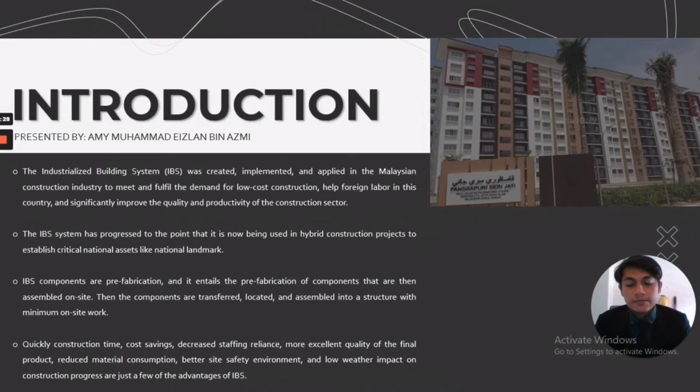IBS also consists of prefabrication, and it entails the prefabrication of components that are then assembled on sites. The components are transferred, located, and assembled into the structure with minimal on-site work. Quick construction time, cost saving, decreased staffing reliance, more excellent quality of final product, reduced material consumption, better site safety environment, and low weather impact on construction progress are just a few advantages of IBS.

The aim of this research is to identify the components of the industrial building system at Seri Jati Apartments, Setia Alam. The objectives are: first, to justify the concept and framework of IBS in Seri Jati Apartments; second, to identify the application of the IBS system in Seri Jati Apartment; and lastly, to investigate the modular components of IBS and IBS score calculation in Seri Jati Apartment.

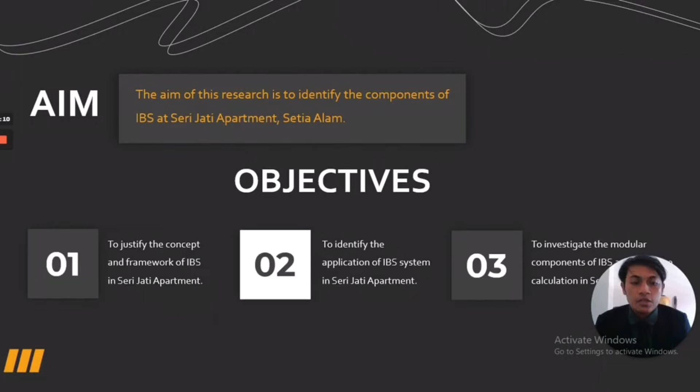Next slide, I will present the background of the case study. The case study about the industrial building system has been conducted at Seri Jati Apartment, located at Off Persiaran Setia Prima, Precinct 15, Setia Alam, 40170 Shah Alam, Selangor.

This apartment consists of 6 blocks, 3 of which are 10 storeys while the remaining 3 are 11 storeys, with a total built-up area of approximately 813 square feet. Seri Jati Apartment construction was launched in 2012 and was fully completed in 2014. SP Setia in charge of the project development, the design of this construction apartment uses strong suits. The building incorporates the vertical and horizontal duplication of parts.

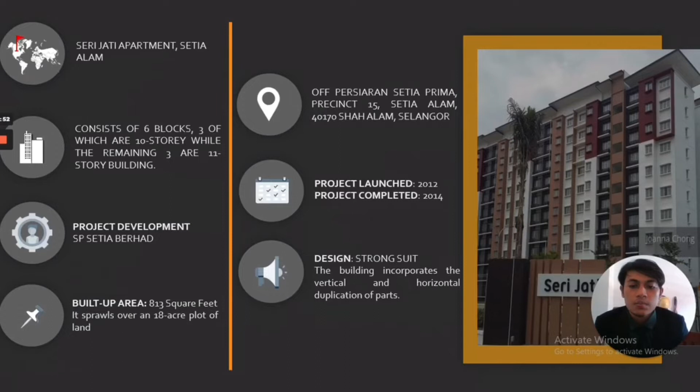Assalamualaikum, my name is Siti Noizati binti Muhammad and I would like to present about the concept and framework of IBS. The IBS concept is appropriate for buildings with a straightforward design structure.

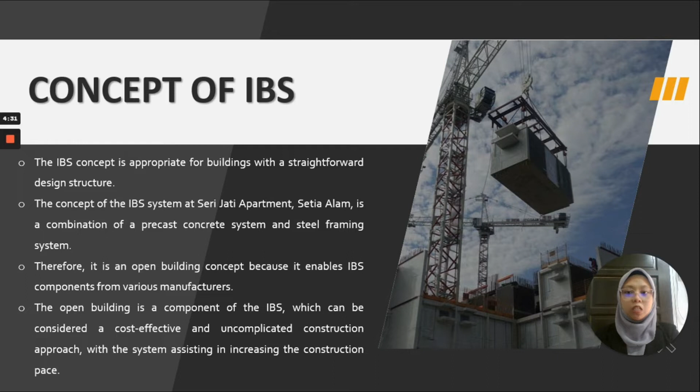The concept of the IBS system at the Seri Jati Apartment Setia Alam is a combination of a precast concrete system and steel framing system. Therefore, it is an open building concept because it enables IBS components from various manufacturers. So this is the type of IBS components, which are the precast concrete system and steel framing system.

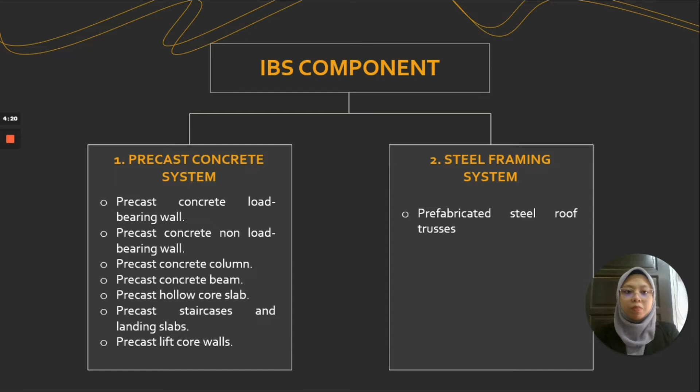We go first with the precast concrete system. The first one is the precast load bearing wall. The precast load bearing walls are an entire IBS factor in constructing the Seri Jati Apartment. The horizontal loads are transferred to the shear walls or service core by the precast load bearing wall component.

The next one is the precast non-load bearing wall. A precast non-load bearing wall is a wall that does not support any of the building structure, and it is sometimes called a partition wall.

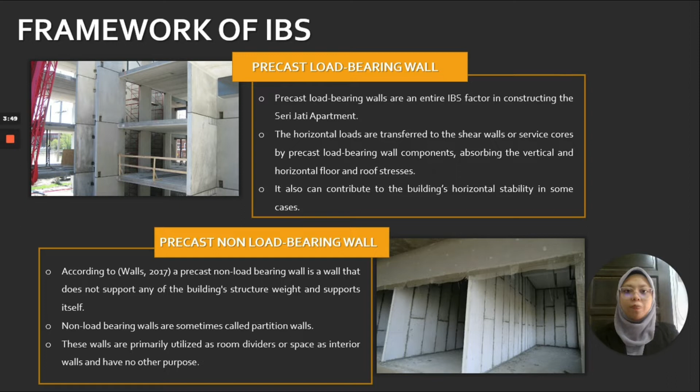The third one is the precast concrete column. A precast column is a load-bearing structural member widely used to support beams and slabs. Precast concrete columns are cast and cured on the ground before being lifted and placed where they are required.

The next is the precast concrete beam. The precast concrete beam is a load bearing structure that can support horizontal and vertical loads. The precast beam is simple and practical in design.

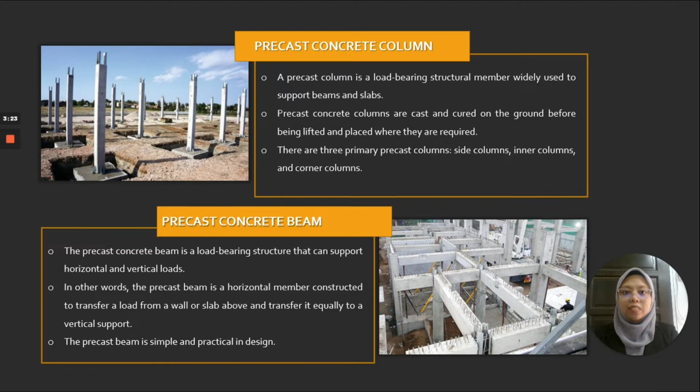Then we have the precast hollow core slab. Hollow core slab is a type of precast concrete slab. It is also called a void slab, hollow core plank, or simply a concrete plank.

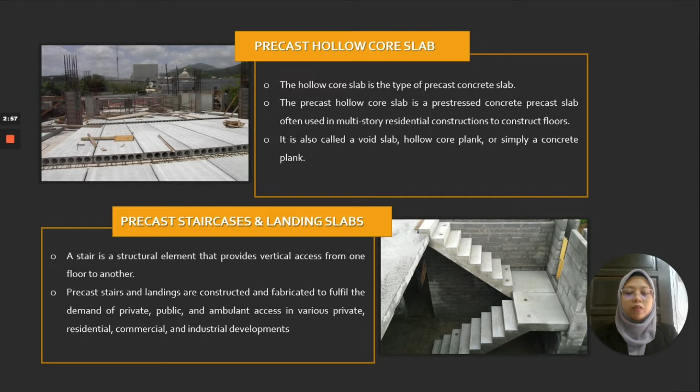Next is precast staircases and landing slabs. Precast stairs and landings are constructed and fabricated to fulfill the demand of private, public, and ambulant access in various private, residential, commercial, and industrial developments.

The precast lift core walls. The lift core is a means of transporting from one floor to another in a building. The precast lift core walls are commonly used in multi-story buildings such as apartments.

Lastly is the precast steel roof trusses for roof structure. Prefabricated steel roof trusses are a type of steel framing system. Seri Jati Apartment has used the Howe truss type for roof trusses.

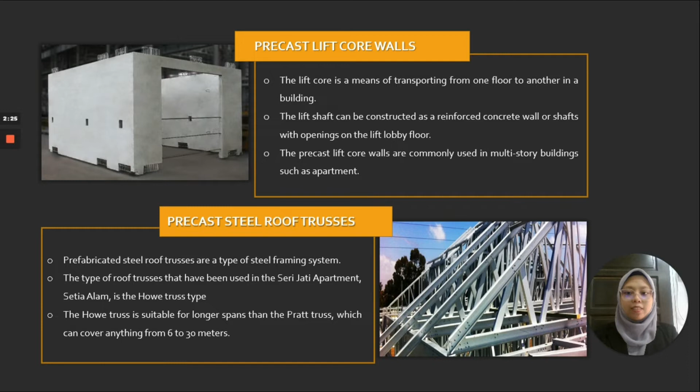For the construction system of Seri Jati apartment, conventional construction was used for the foundation and ground floor construction, but a larger part of the building used the IBS method. According to Kow data scoring, the IBS content score for block 6 of Seri Jati apartment is about 81.9%, which has been finalized. There are 3 advantages of the IBS score for this project.

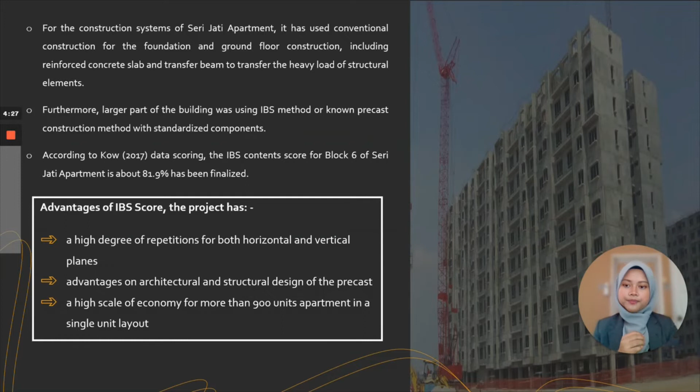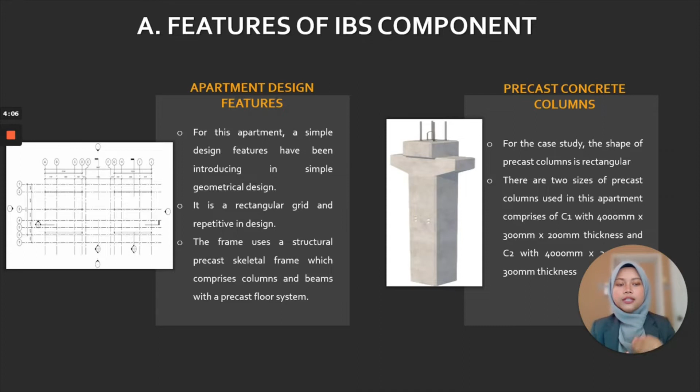Features of IBS components: first, apartment design features. For this apartment, simple design features have been introduced, with simple geometric designs, rectangular grid, and repetitive design. Second, precast concrete column, where the shape of the precast column is rectangular, and there are 2 sizes of precast column used. Next, precast hollow core slab.

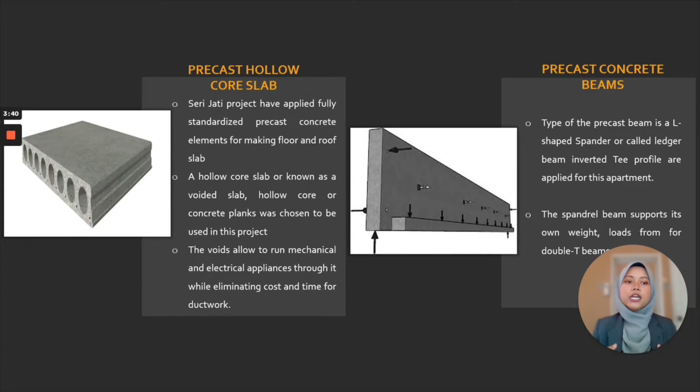Seri Jati project has applied fully standardized precast concrete elements for making floor and roof slab. A hollow core slab, also known as a voided slab, was chosen to be used in this project. Next, precast concrete beam. The type of precast beam is an L-shaped spandrel, or called inverted ledger beam. This profile is applied for this apartment.

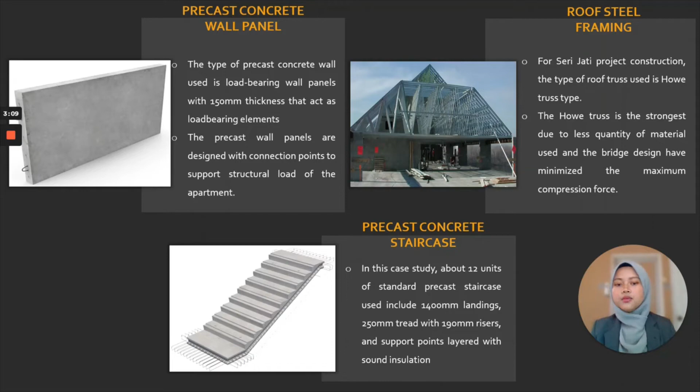Next, precast concrete wall panel. The type of precast concrete wall used is load-bearing wall panel with 150 mm thickness that acts as a load-bearing element. For the roof steel framing, the type of roof truss used is Howe truss type. Last, precast concrete staircase. In this case study, about 12 units of standard precast staircase were used, with support points layered with sound insulation.

Next, IBS suitability. IBS is suitable for use in the Malaysian construction industry, especially for housing where the building functions require mass production. There are some advantages of IBS adoption, including reduced project duration, saved costs for workers and materials, and others.

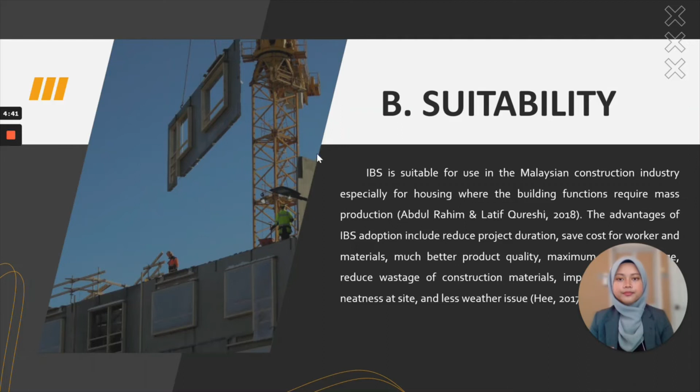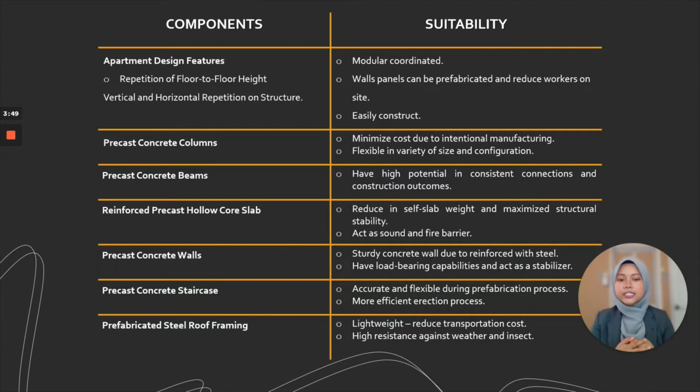For the reinforced precast hollow core slab, it could reduce slab weight safely and maximize structural stability, and acts as a sound and fire barrier. For the concrete wall, it is sturdy for strength due to being reinforced with steel. For the precast concrete staircase, it is accurate and flexible during the fabrication process. And last, prefabricated steel roof framing, which is lightweight and could reduce transportation costs.

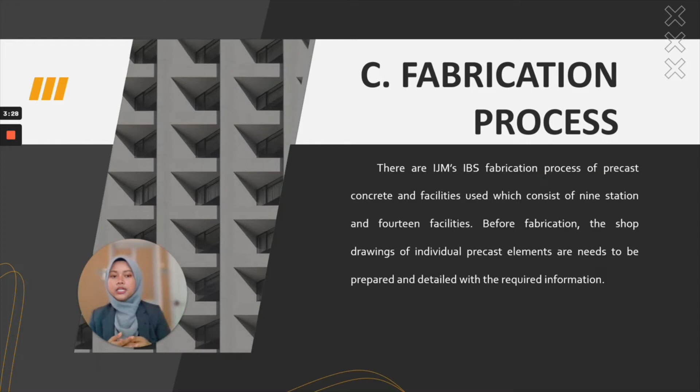Next, the fabrication process. There are IJM's IBS fabrication processes of precast concrete and facilities used, which consist of 9 stations and 14 facilities. Before fabrication, the shop drawings of individual precast elements need to be prepared. The first station is the pallet cleaning station, where the pallet is cleaned and freed from debris.

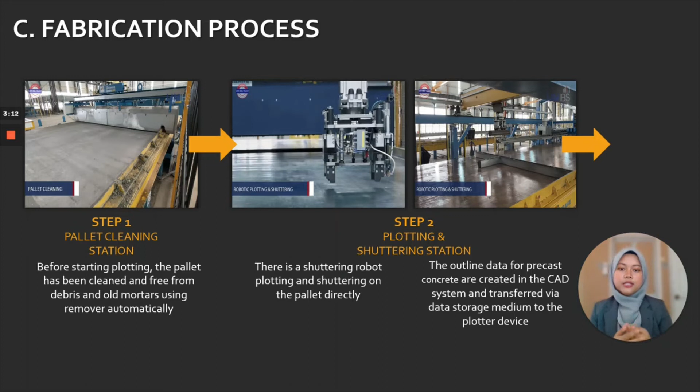Next, plotting and shuttering station, where a shuttering robot performs plotting and shuttering on the pallet directly. Third station is mesh reinforcement. An automatic customizable mesh production machine is used, and it is more intelligent and convenient because of the adoption of a PLC control system with touchscreen input.

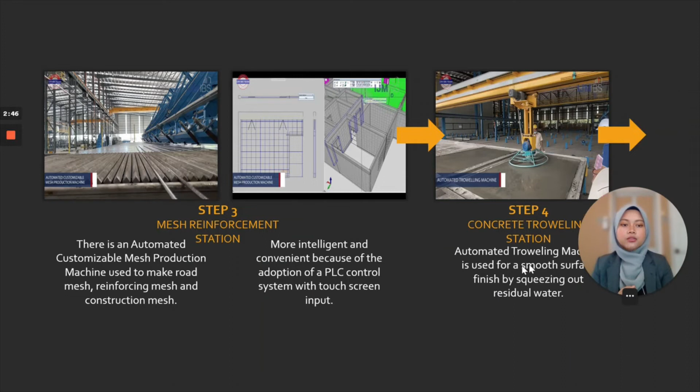For the fourth station is concrete troweling. An automatic troweling machine is used for a smooth surface finish. Fifth step, pallet stacker and curing chamber. An automatic pallet stacker is used for stacking the pallet into the curing chamber for natural curing.

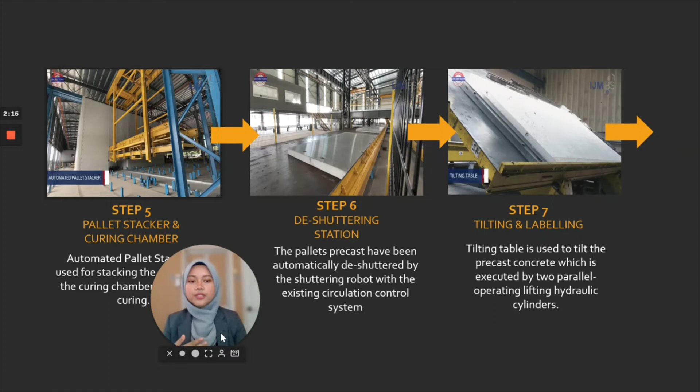Step 6, de-shuttering station, where the precast pallet is automatically de-shuttered by the shuttering robot. Step 7, tilting and labeling, where the tilting table is used to tilt the precast concrete, which is executed by two parallel operating lifting hydraulic cylinders.

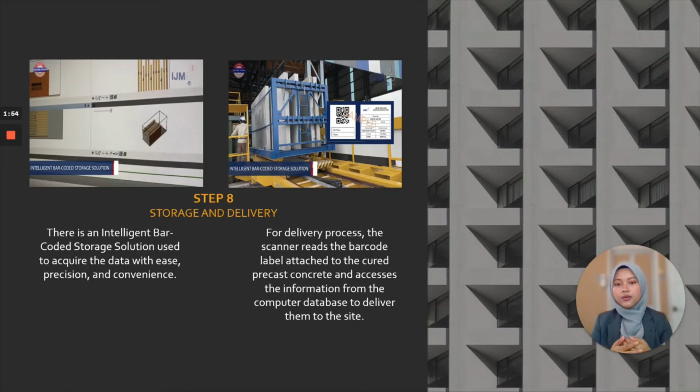The next, or last, step is storage and delivery. An intelligent bar-coded storage solution is used to record the data with precision and convenience. For the delivery process, the scanner reads the barcode label attached to the cured precast concrete and accesses the information from the computer database.

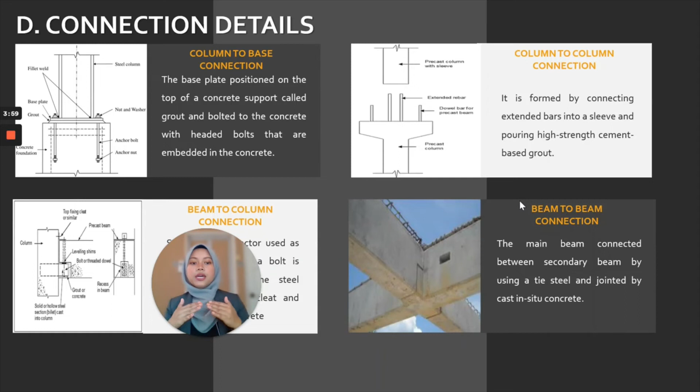Next, beam to column connection. A steel billet connector is used as the connection, where a bolt is installed through the steel billet to a bolted cleat and tied by concrete. Next, beam to beam connection: the main beam is connected between secondary beams using tie steel and joined by cast-in-situ concrete.

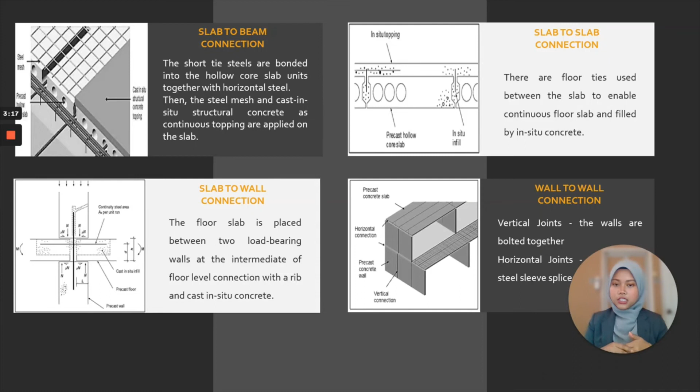Slab to wall connection: the floor slab is placed between two load-bearing walls, with the intermediate floor level connected with a rib and cast in situ concrete. For wall-to-wall connection, there are two joint types: vertical joints and horizontal joints.

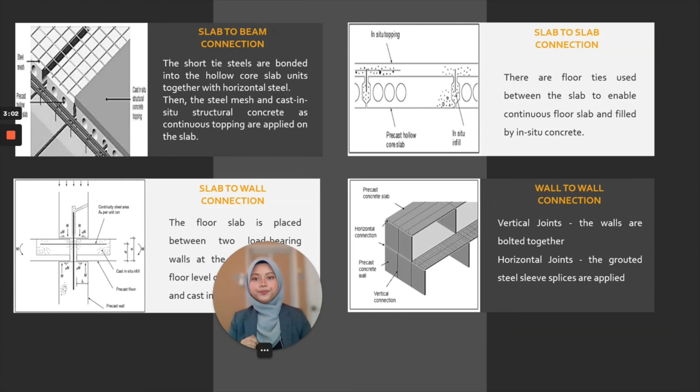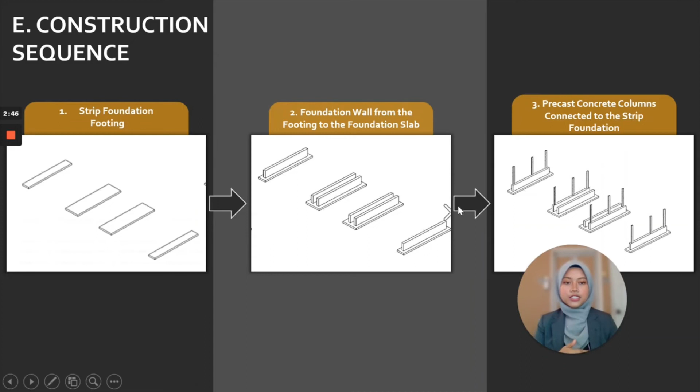First, strip foundation footing is applied. Next, foundation wall from the footing to the foundation slab. Third, precast concrete column connected to the strip foundation. Fourth, casting of foundation beam.

The next process is the installation of precast floor slab. Sixth, installation of first floor beam. Then the installation of precast wall. Eighth, installation of prefabricated window, door and staircase.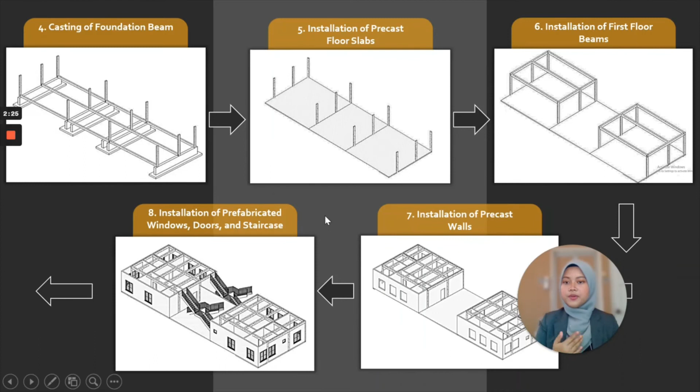Ninth, repeat the sequence from 1 until 8, then casting of roof beams and roof slab, finishing with exterior wall painting and interior tile finishing.

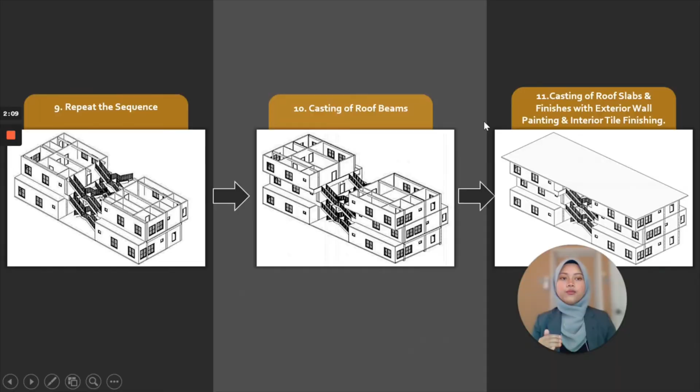My name is Rebecca Adawiyah binti Mazmi. I want to present about modular component of IBS.

First, modular component of column: column 1 and column 2 consist of different thickness. Column 1 consists of 12 units per every floor. Column 2 has 24 units per every floor.

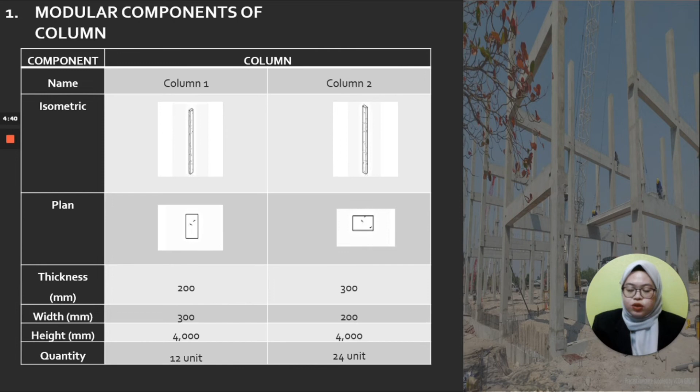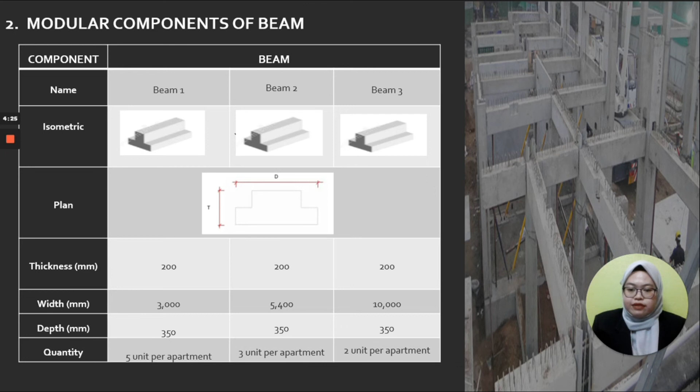Next, modular component of beam. They are using the same type of design, T-beam, with the same thickness and depth but different width based on the area. Next, modular component of wall panel 1, 2 and 3 with the same thickness.

Wall panels 1, 2 and 3 have the same height with different width, using different widths based on the area.

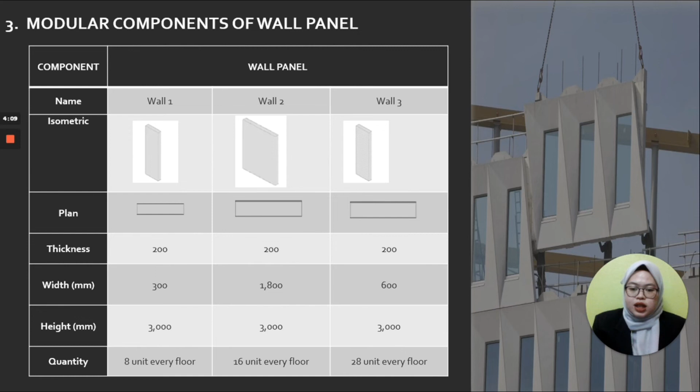Next, modular component of slab. Slab 1 is used based on the area: living room, bedroom and dining room. Slab 2 is based on the area for bathroom, and slab 3 for the area yard.

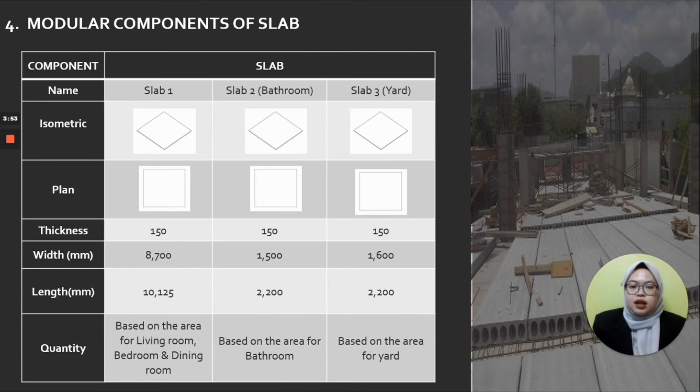Modular component of doors. Door 1 is used in all types of rooms with the material timber door, using 4 units per apartment house.

Door 2 is for bathroom, using the material plastic door, 3 units per apartment house. Door 3 is the emergency door, used in the lift lobby, with the material solid timber occasionally coated with fire resistant glass. There is only one in every floor lobby.

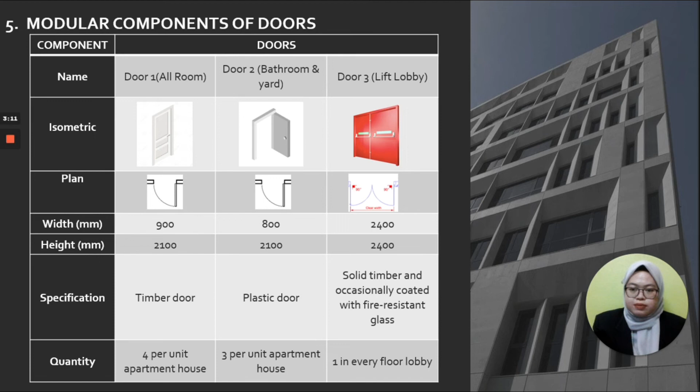Next, modular component of windows: Windows 1, 2 and 3.

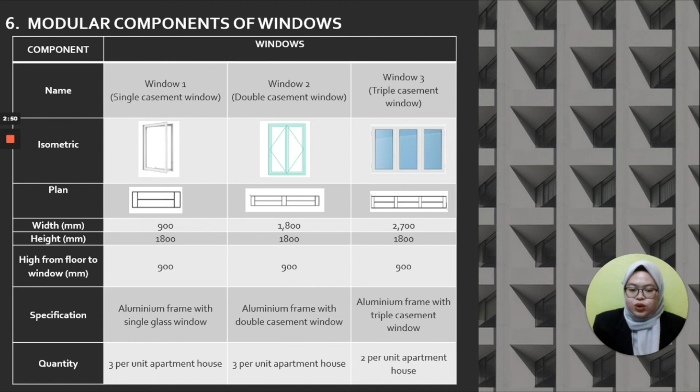Window 1 is a single casement window consisting of 3 units per apartment house. Window 2 is a double casement window consisting of 3 units per apartment house. Window 3 is a triple casement window consisting of 2 units per apartment house.

Lastly, modular component of staircase. They use precast concrete staircase and landing cast in retaining wall. The unit of staircase is 1 unit per every floor with floor to floor height of 3000 millimeters.

The tread and riser are the same: 250 mm for the tread and 157 mm for the riser. That's all from me.

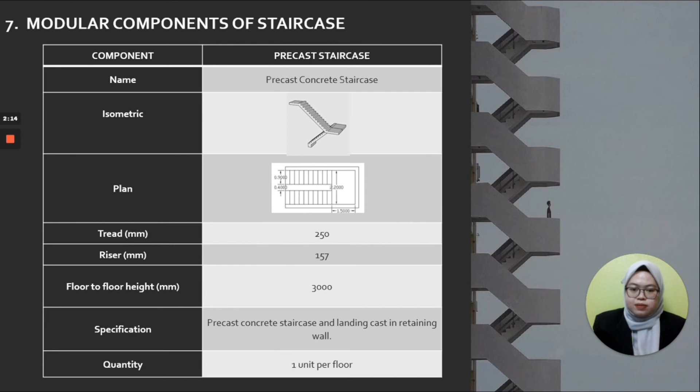Next, I will present the IBS score calculation for Seri Jati Apartment Shah Alam. The maximum IBS score for a building is 100 points.

The IBS score is divided into 3 parts: part 1, structure system with maximum score of 50 points; part 2, wall system with maximum score of 20 points; and part 3, other simplified construction solutions with maximum score of 30 points.

The IBS score can be obtained using the formula shown in the slides. However, if the project consists of more than one building, the calculation can be made by multiplying the percentage of construction area of the respective building with the IBS score of one building.

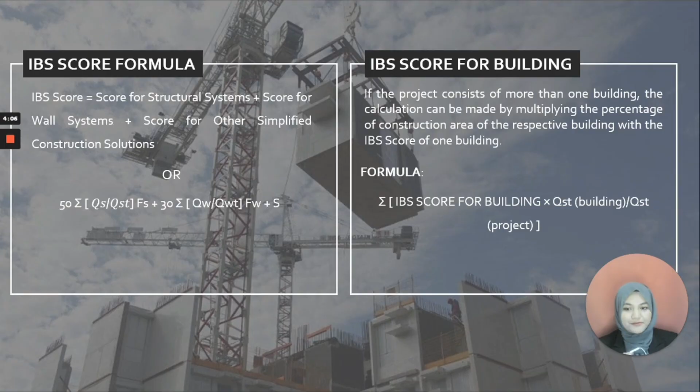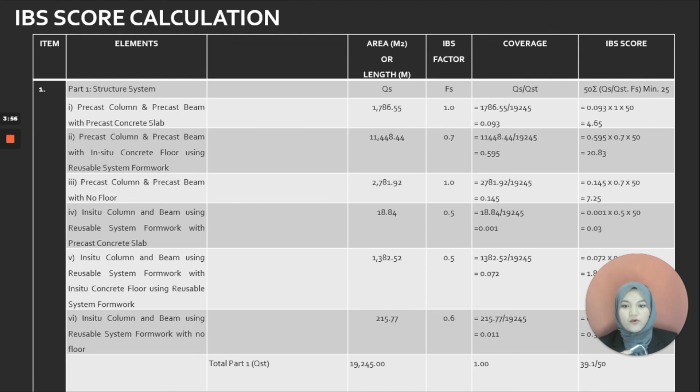For our case study, the IBS score is obtained using the formula from the previous slide, where part 1 is 39.1 over 50, part 2 is 18.8 over 20, and part 3 is 24 over 30, with the overall total IBS score for Block 6 of Seri Jati Apartments Shah Alam being 81.9 over 100.

So that's all from me.

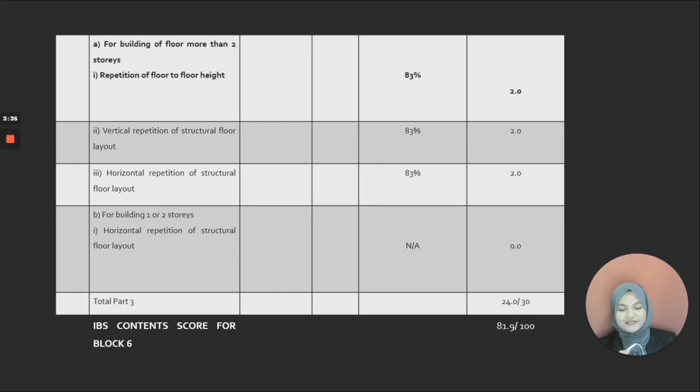Thank you. In conclusion, the IBS system in Malaysia has evolved from time to time and many building constructions in Malaysia have been adapted with the IBS system. All construction players must adopt or be willing to accept the IBS system if the industry is to go forward.

The delays in construction can be avoided with the implementation of the IBS system. Seri Jati Apartment Shah Alam has been constructed with the IBS system and developed an open building concept. Therefore, IBS should be regarded as a groundbreaking advancement in the construction industry.